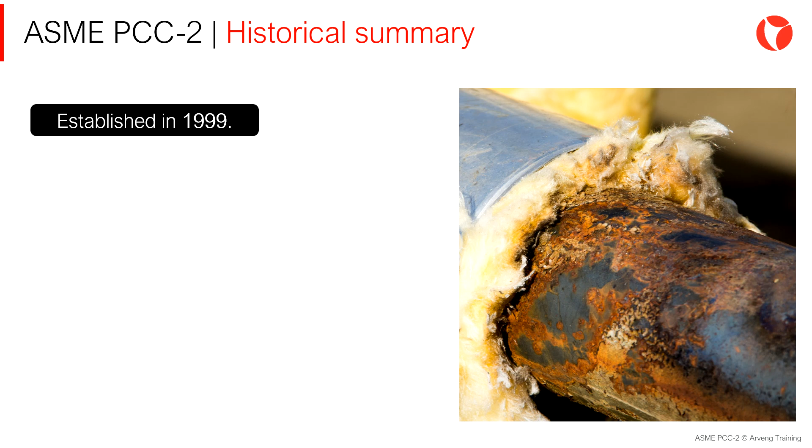In 1999, the ASME PCC-2 subcommittee on repair and testing was established. The objective was to document recognized and generally accepted engineering practices. In reality, equipment repairs have been carried out since the installation of the very first pipeline, so the fundamental objective of this committee was to document and defend from a technical standpoint what was already being done. It's interesting to note that these committees work by a voting method to achieve consensus. The articles are relatively generic and can be adapted to the specific conditions of the failures at a particular industrial facility.

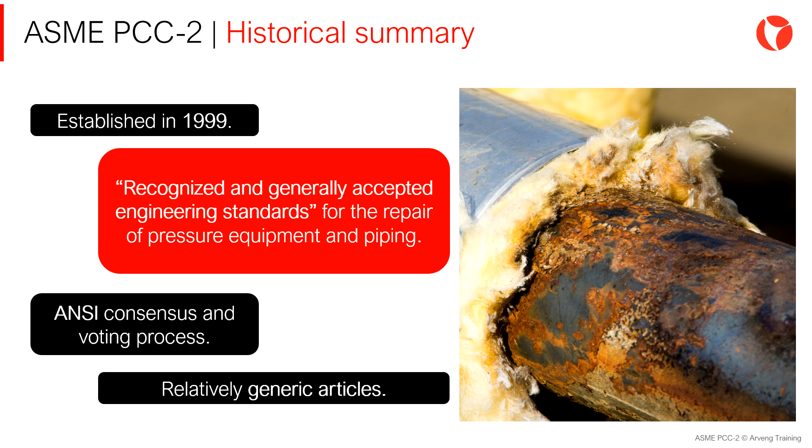The scope of ASME PCC-2 includes all equipment within the scope of ASME, such as Section 8 Division 1, Division 2, Division 3, ASME B31, etc. It includes piping and piping components such as valves, flanges, and fittings, boilers, pressure vessels including heat exchangers, and storage tanks. It's important to note that ASME PCC-2 may be used on equipment constructed in accordance with other codes and standards.

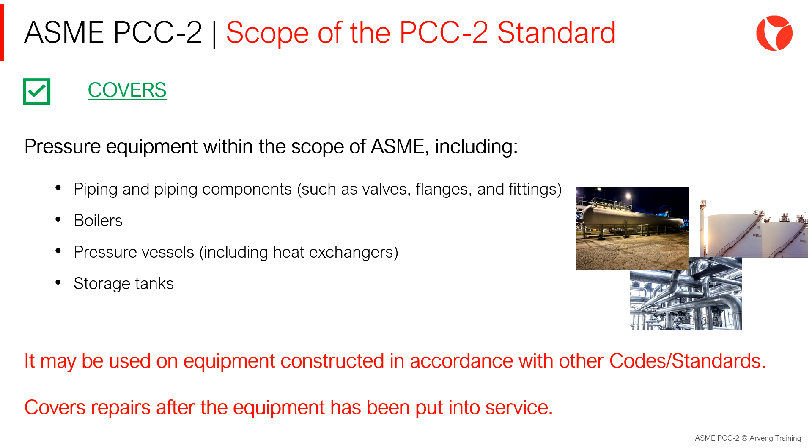There are many systems and codes that do not have a framework as broad and complete as ASME to define repairs, so in those cases we can also apply PCC-2. It's worth clarifying that this is not optimal, but if no other repair method or repair compendium is available, applying it will, in some ways, be better than nothing. As we already mentioned, this code covers repairs after the equipment has already been placed in service. Repairs during construction are covered by new construction codes in such cases.

Now we ask ourselves, what is not covered or what can we not evaluate with PCC-2? Well, this code does not include requirements for new constructions, planning and preparation of inspections, risk studies and inspection plans, methods and techniques of in-service inspections, and flaw assessments and fitness for service evaluations. Each of the topics mentioned are covered by different codes or standards, which are integrated into PCC-2 to help the user maintain mechanical integrity.

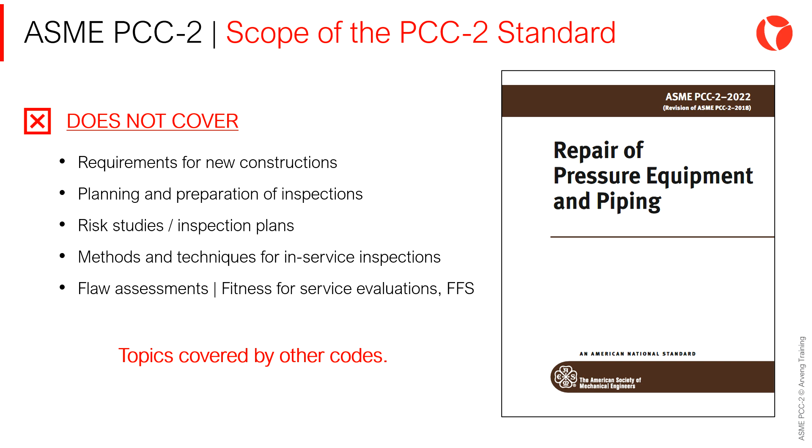As we saw previously, this standard provides methods for the repair of equipment, piping, pipelines, and associated ancillary equipment after they have been placed in service. All repair methods included in this code include relevant design, fabrication, examination, and testing practices, and may be temporary or permanent repairs depending on the circumstances.

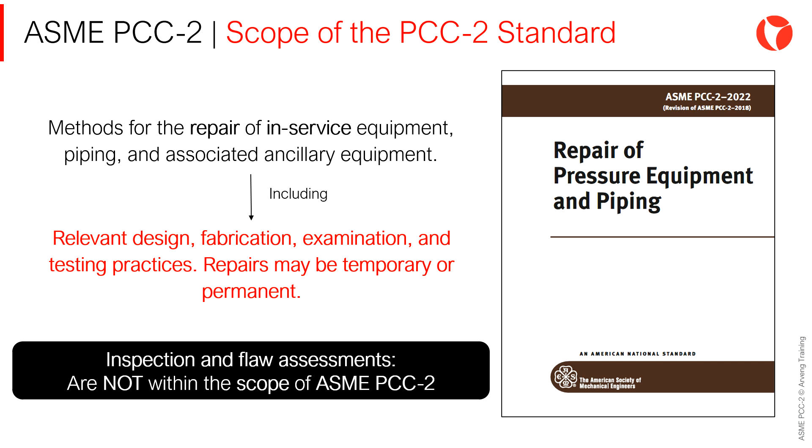Inspection and flaw assessment methods are not within the scope of ASME PCC-2, but are covered in other post-construction codes and standards such as API 510 or 570 for inspections, and later API 579 for flaw assessment, as we already mentioned.

The intent of ASME PCC-2 is to provide technical information, procedures, and recommendations for repair methods that were determined by consensus to be recognized and generally accepted as good engineering practice. That's why we talk about guides and guidelines for repair, and also why there are a series of gray areas in the code that, in many cases, leave the choice of using one method or another in the hands of the designer or repairer.

It should also be noted that when equipment repair is subject to local regulations, jurisdictional approval may be required.

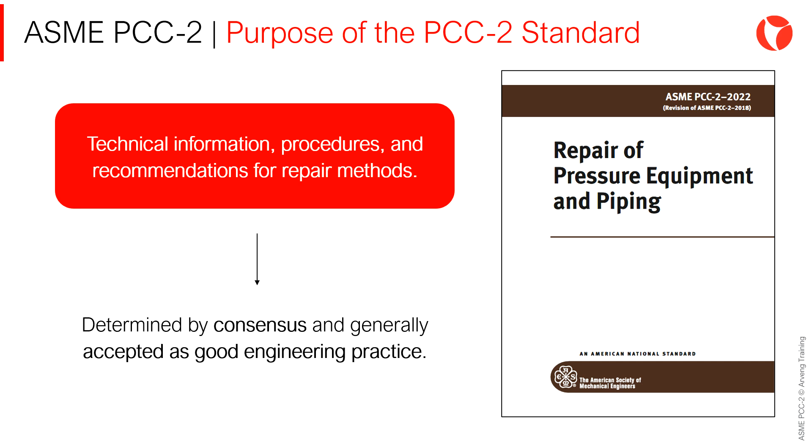It's important to be very clear about the definitions of the words may, shall, and should as they're used in PCC-2 articles, since each one has a different purpose. It's essential to distinguish between them for a correct understanding of the code.

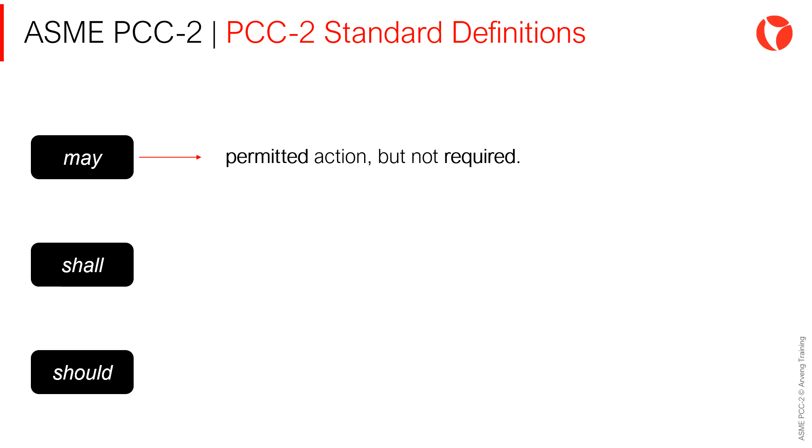May indicates an action that is permitted but not required. Shall indicates an action that is mandatory and is an essential element of the repair method that cannot be eliminated.

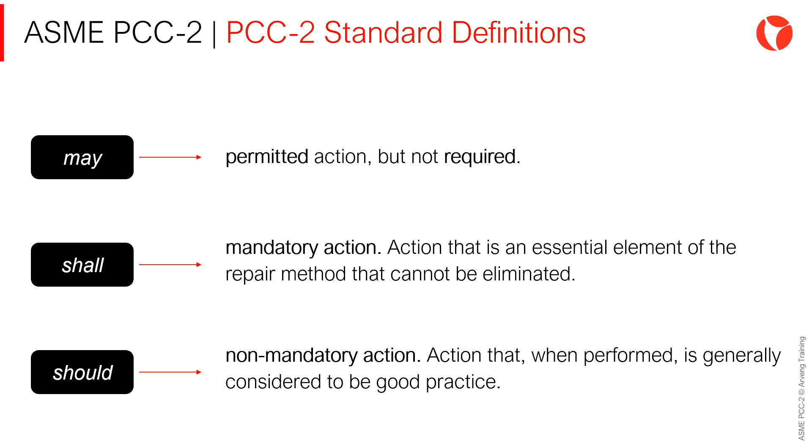Should is an action that's not mandatory. It indicates an action that, when performed, is generally considered to be good practice. However, there are some circumstances when the action is not appropriate or required, so the word should is used to provide flexibility for the article, covering a broad range of circumstances. It's not mandatory unless specified by other articles.

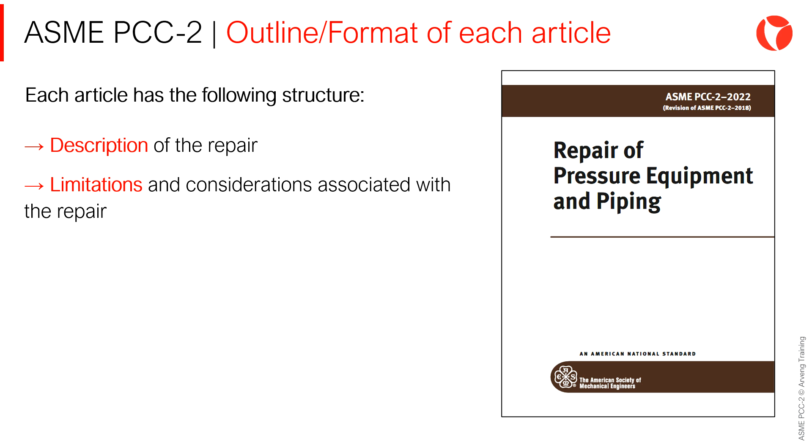Each of the code articles follows the same format. The repair method changes, but the structure is always the same, so it's familiar and easy to read for the user. First, a description of the repair method is made. Then, the scope and limitations associated with the repair are defined, that is, on which equipment and under what circumstances said repair can be carried out.

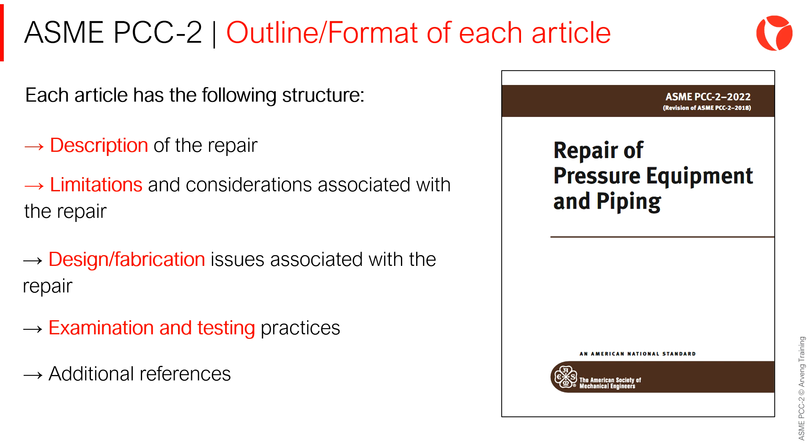Then, if applicable, it goes over any design or fabrication issues associated with the repair itself. It then discusses examination and testing, and finally, if applicable, it lists publications referenced in the article. Administrative requirements, which are the records associated with technical requirements, include inspection reports, maintenance record, documentation requirements, approval and record requirements, etc.

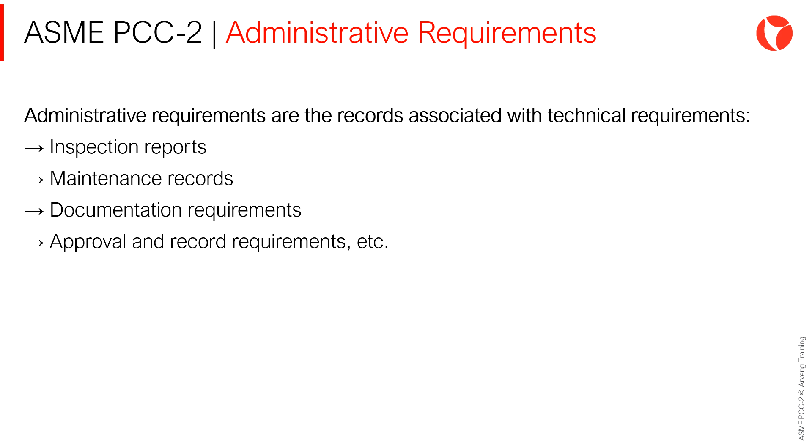These are not contained in the PCC-2 standard. The PCC-2 standard does not contain this type of administrative or legal requirements. It focuses on technical issues associated with the repair itself, for example, guidance on recommended methods for performing repairs.

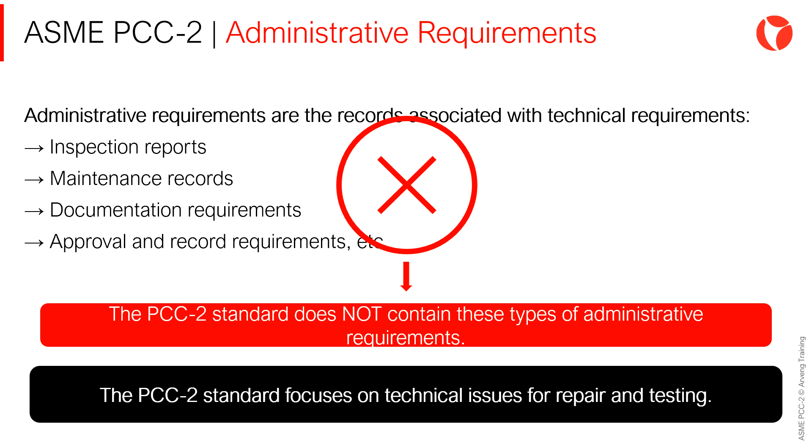Temporary versus permanent repairs: PCC-2 does not classify repairs as temporary or permanent. It's the responsibility of the owner or user to determine the expected useful life of each repair. There are many aspects that influence when determining whether a repair is temporary or permanent.

A temporary repair is basically a repair that's done urgently until there's an opportunity to make a permanent repair, although this is not defined in PCC-2, as it does not define what a temporary or permanent repair is. What it does provide is a series of repair methods so that the user can choose and apply an appropriate repair. Technical considerations affecting the expected life of the repair are stated in the individual articles to allow the user to properly determine inspection and replacement intervals.

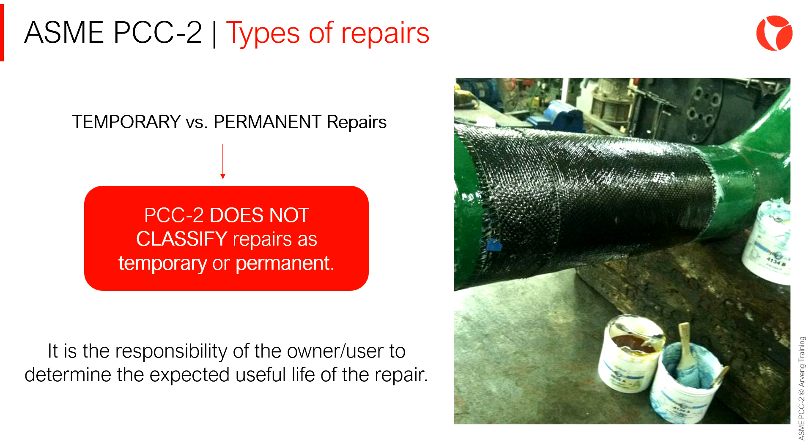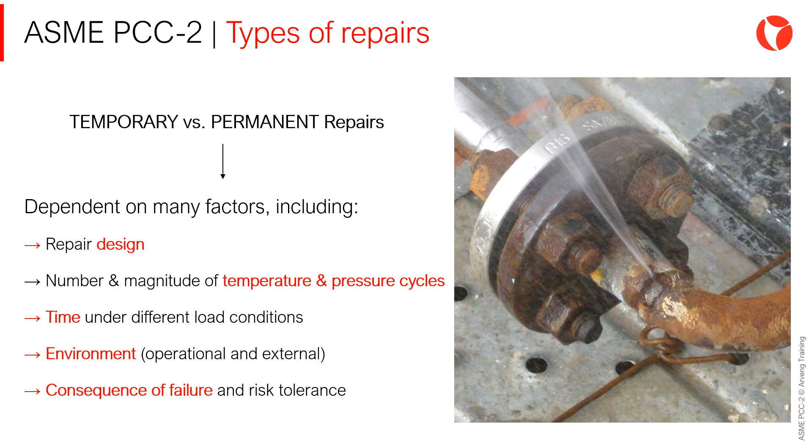Why doesn't PCC-2 define whether a repair is permanent or temporary? It's because the expected life of a repair depends on many factors, including repair design, number and magnitude of temperature and pressure cycles, that is, if we talk about cyclical or non-cyclical services, the time under different load conditions, the environment regarding an internal or external flaw, the consequence of failure and risk tolerance, since intervening on a critical pipeline is not the same as on a non-critical one.

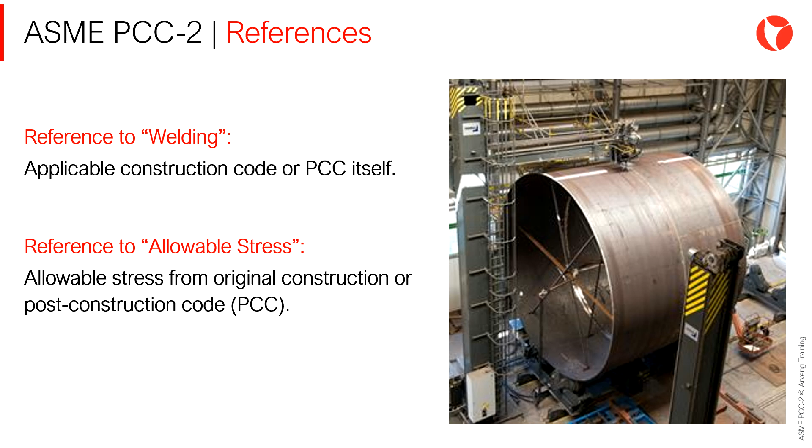In the introduction, reference is made to welding. Whenever we talk about welding and the different repair methods, the applicable construction code or the PCC itself must always be followed except where otherwise indicated. The same applies to the concept of allowable stress. For calculations involving the allowable stress, the value from the original construction code or post-construction code is used unless otherwise specified in specific articles.

Now we ask ourselves, what is allowable stress? This concept may seem very basic, but it's essential to be clear about it since it will be discussed in the different passages and repair sections.

The stress used in the design will always be a value lower than the elastic or yield limit, so as to ensure that irreversible plastic deformations will not occur in the material. The allowable stress is not a value that's established randomly, but rather is a design value that's obtained based on the type of material and the temperature, since the properties of the material change with changes in temperature.

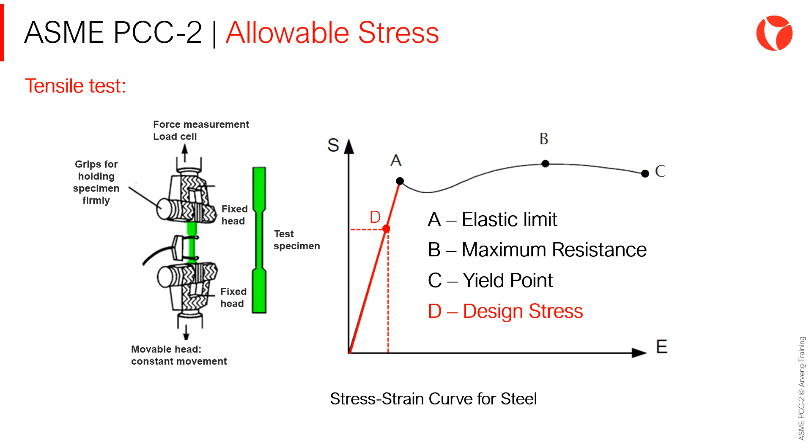Approximately and generically speaking, this value is usually 2/3 of the yield. Here we can see this quite clearly. If we work with Division 1, the safety coefficient is 3.5, and if we work with Division 2, it will be 2.4. The allowable stress is calculated as the lowest value between 2/3 of the elastic limit or the ultimate tensile strength divided by the design factor.

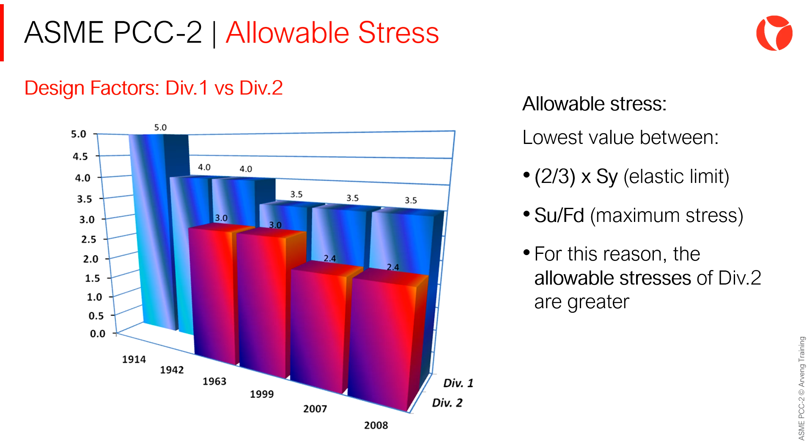Why is it greater in one case than another? Because when we work with rules, the analysis is more superficial than in the case of a design by analysis where we obtain the induced forces in greater detail.

So what we saw previously is where the allowable stress comes from. How do we see this? We can go to ASME Section 2, Part D, where we'll find the tables of different materials. Table 1A, as seen on the screen, is applicable to ASME 8, Division 1.

There we can see that the allowable stresses of different materials are tabulated as a function of temperature. The allowable stress is important for repairs since the materials used for repairs must have at least the same allowable stress as the base material.

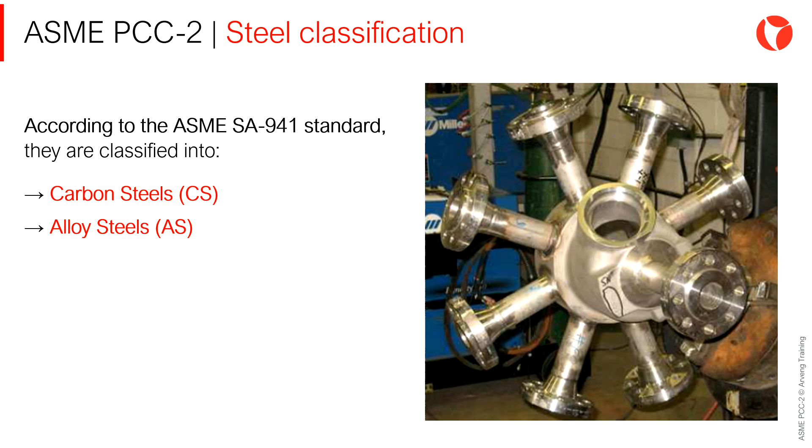To finish this lesson, we'll quickly comment on the classification of steels. There are many ways to classify steels, with differences depending on the source consulted. According to ASME SA 941 standard, which provides the definitions of steel groups, they're classified as carbon steels, alloy steels, low alloy steels, and stainless steels.